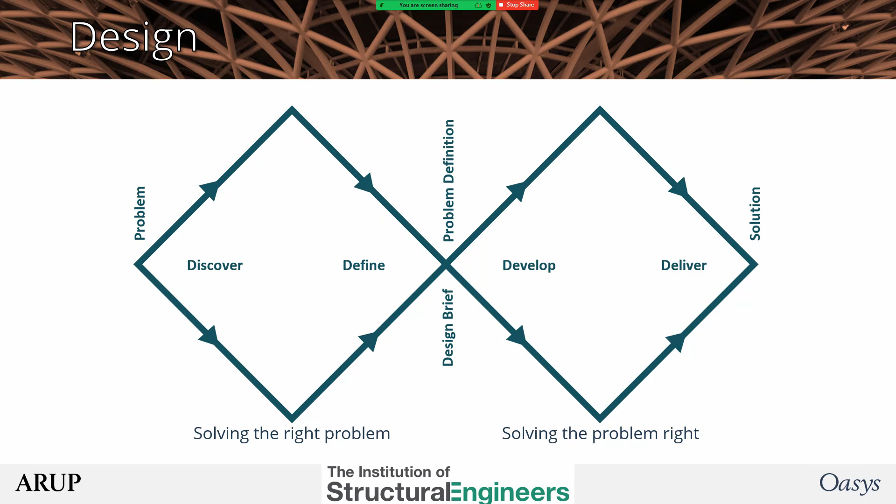Now, the Design Council puts design another way—there being more than one way to do something—and they introduce us to the design double diamond, where the project starts from the left and works across to the right. In the discovery and development phases, the design broadens as you explore the options—what they can be—so don't close these options down too soon. Whereas it's in the define and deliver phases that you need to refine and concentrate on what the problem is and what your solution is. And even this doesn't take into account the cyclical nature of design.

To help with that, I want to take a closer look at the development phase and the method we call parametric design. We all know that layouts are driven by constraints and dimensions. We know it too well when the architect or client changes them, making the scheme bigger or smaller, and then we have to start all over again. With parametric design, we plan for the change by encapsulating those constraints and rules into a geometric computer model—a design led by parameters.

This might be mundane, like the span of a decking slab, or complex, like the offset from a curved spline surface. Parametric design started in the aeronautical industry, and I think the first significant parametric design in the building industry was Frank Gehry's Guggenheim Museum in Bilbao, Spain, which opened in 1997. Parametric design in the 90s ran on supercomputers using software designed for making fighter jets. Today, it's much simpler—programs like Rhino, running a plate of spaghetti script in Grasshopper to generate the geometry, then exporting for FE analysis and CAD for detailing and documentation.

Now, BIM—building information modeling—used to be all about neutral file formats, but we've moved on from that today. Now it's all about digital workflows, though the underlying principle of data reuse remains the same.

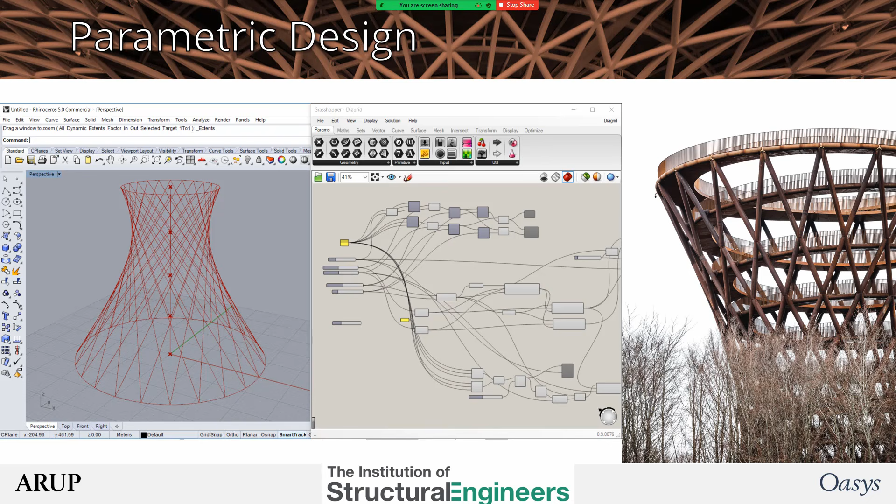Now, you've got design, you need to validate the design, usually using finite element analysis. FE was first used in the 1950s, aircraft again, and in the 1960s on buildings. As far as I know, the first structural engineering use was by Arup on the Sydney Opera House, though I'll be very interested to know if you know of any earlier examples.

FE books tend to focus on the maths of the methods, which is great if you want to write your own program, but the majority of engineers just want to use a commercial program. So my aim here was to teach how to make the best models with a little bit of maths thrown in, as it can be interesting and informative. As a side note, I think FE maths tends to be taught more at universities because marking maths is a lot easier than modelling.

Modelling is an art, and therefore there is no one right way of doing it. Rather, there are better ways and worse ways, and occasionally a completely wrong way of doing it, of course. So, what is a model?

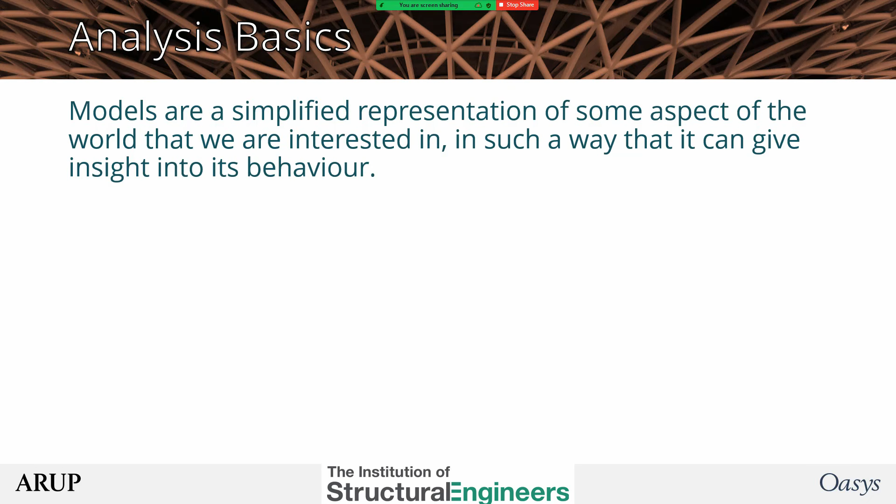Models are not reality. So this is not a real beam, these are not real connections. They are a simplified representation of reality. The model doesn't represent everything about the real connection, the real beam, but they are close enough for engineering.

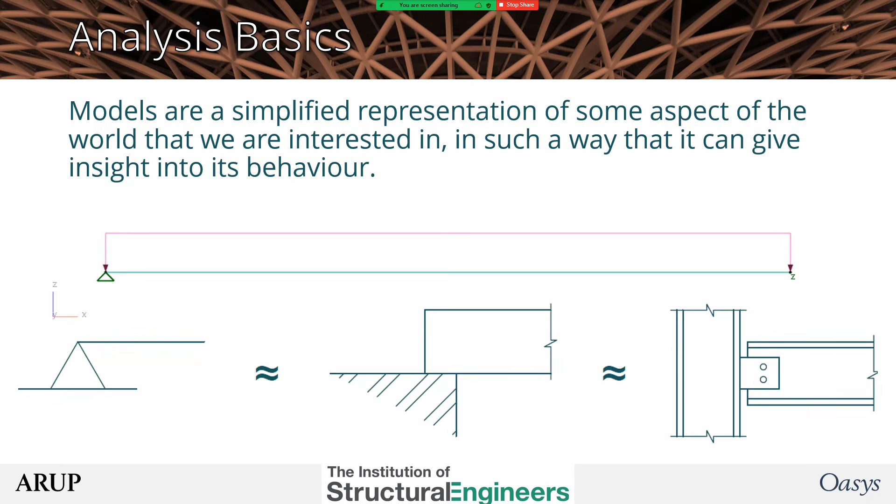So the model is a simplification of reality, it's not reality, and therefore it's important to remember that all models are wrong, but some models are useful.

Is it possible to do a totally realistic model and test it with everything the real structure experiences over its service life? No. The closest you can get is to build the structure for real out of steel and concrete, then load it until it breaks, then repeat with other loadings.

But would that be 100% accurate? Well, no, that won't be either. Due to tolerances, the steel and concrete sections will be slightly different size, the frame won't be quite as plumb, and the wind, snow, and earthquake loads will not be exactly the same. Besides which, we don't know exactly what the structure will experience over the next 50 years. It's just not possible. As I said, the art of engineering is to get answers which are close enough.

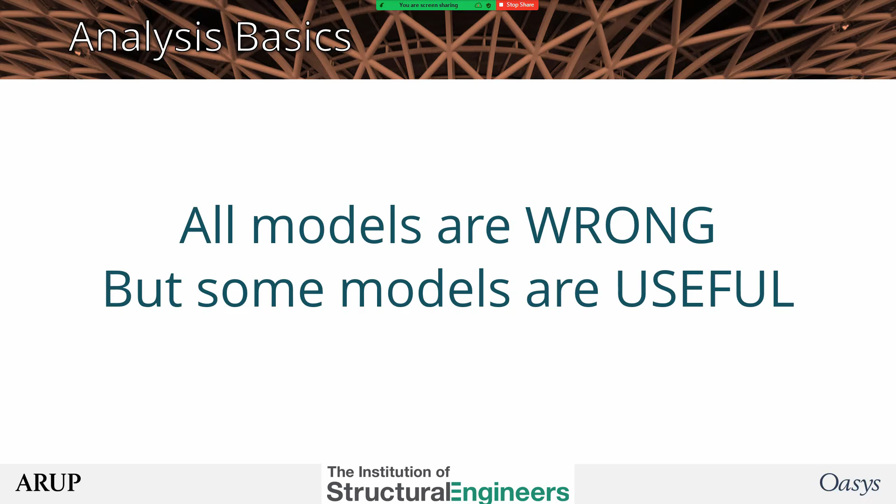To illustrate this, let's consider the stool paradox. If you sit centrally on a three-legged stool, then your weight will be carried approximately equally down each leg. Design load on each leg is your weight divided by 3.

But if you sit on a four-legged stool, then will design load be divided by 4? No, because the stool will not be perfectly built, the floor it sits on won't be perfectly flat, and only 2, possibly 3, legs will actually be fully in contact with the floor. Your weight will be mostly carried by 2 of the legs, meaning that design load is now your weight divided by 2, an increase of 50% thanks to the addition of an extra leg.

Now, when we build analysis models, we tend to assume the structure will be perfect, the floor is smooth, the stool is even, every leg is fully in contact with the floor. Reality is not so neat. On the other hand, structures will often work the way we design them if they have enough ductility. In the case of the stool, the connections may have a little bit of flexibility if they're not glued, the top may warp a bit, and so on.

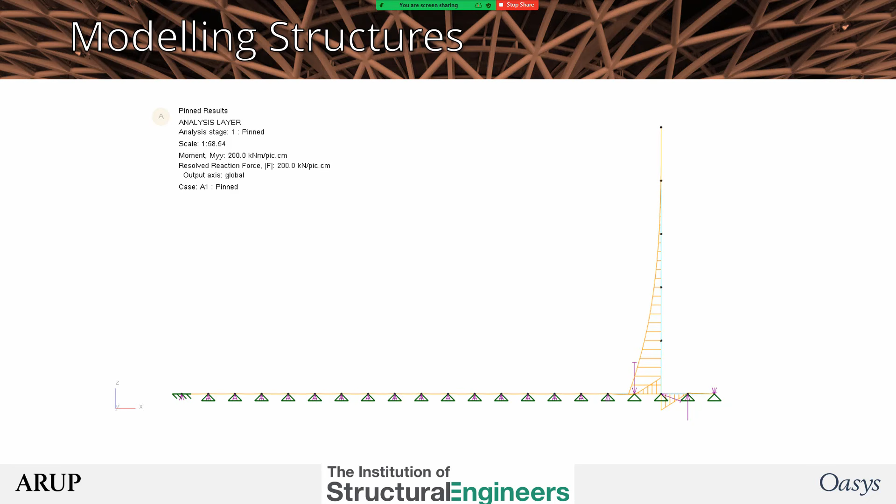So some moment redistribution occurs because of plasticity, but a lot will occur because of the error in assuming that the support is infinitely stiff. Model the ground with springs, or the support with springs, and you'll notice the sagging increases, hogging reduces, and so on. Likewise, the retaining wall model I did back there would also give correct bending moments in the base.

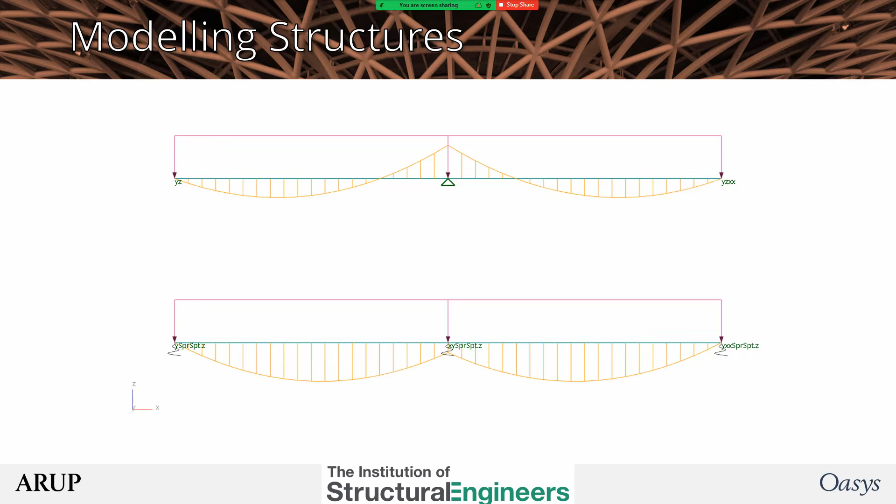Now, do we really know how stiff the beam will be? How stiff the ground? Approximately. How confident can we be with the results?

Well, take a steel beam. When rolled to European tolerance standards, I'm sure South African standards are similar, its area can vary by about 4%, and its bending stiffness by about 10%. This means that for every factory-made beam, there is no point calculating deflections beyond two significant figures. Concrete beam stiffnesses will vary even more, both from tolerances and the effects of cracking, and so on.

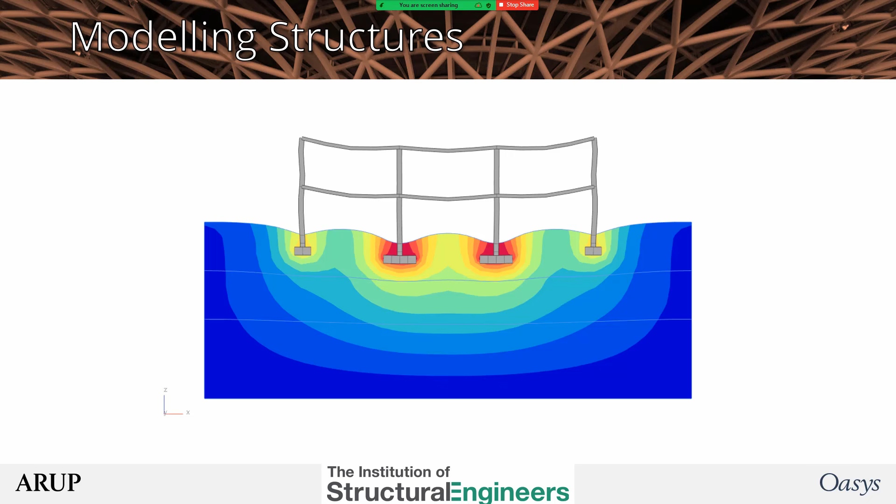Now, FE models are analogues of the real structure, and we model them with 1D, 2D, and sometimes 3D elements. 1D elements are great when the stress flows are essentially one-dimensional, like in beams, where one dimension, the length, is considerably more than the other two. 2D elements are suitable when the stresses move in two directions, with one dimension, thickness, being considerably less than the other two. And 3D elements, well, I think you can guess about that.

Now, these are all analogies, and these analogies will break down when the stress flow directions change, like the connections between the beam or slab and the column. For this reason, a simple overall model can inform a more detailed model of a part of the structure, but you would not want to model the entire structure in such detail. You would not want to model either of these two examples totally in 3D elements. It would be a complete waste of time.

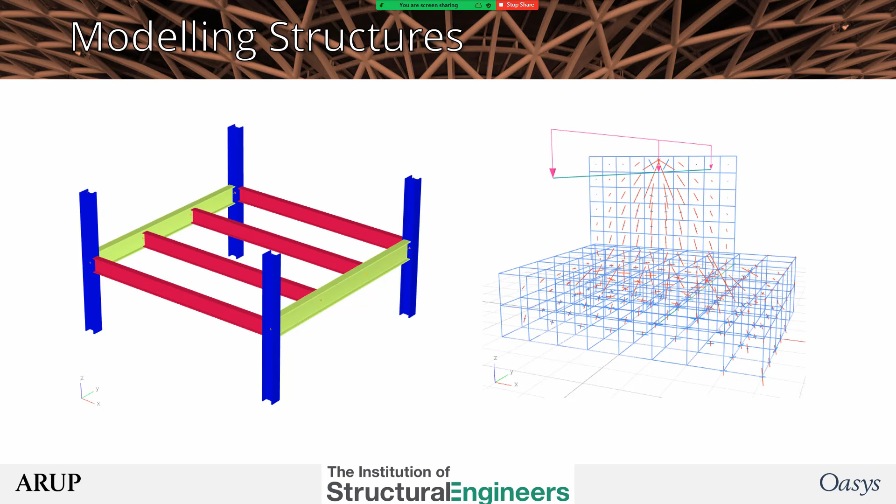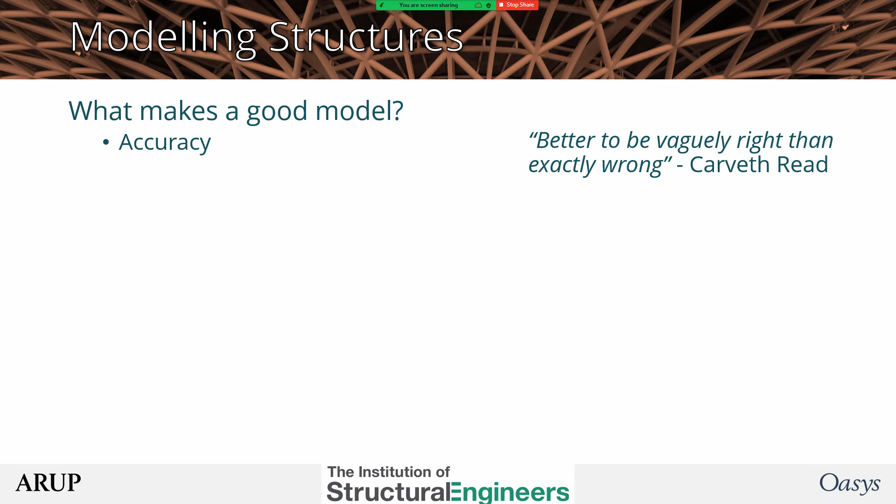So what does make a good model? It needs to be as accurate as necessary. Do a sensitivity check, vary the stiffnesses, the dimensions, do a p-delta or a nonlinear analysis. Are the results close enough? It needs to be as realistic as appropriate. Remember that increased realism is subject to diminishing returns. Stop when it's not worth continuing.

It needs to be as simple as possible. Simplicity comes from experience. My first FE model back in university took 24 hours to run on the university mainframe. Today, I would achieve the same results with perhaps a model with maybe only 1% of the number of elements in it.

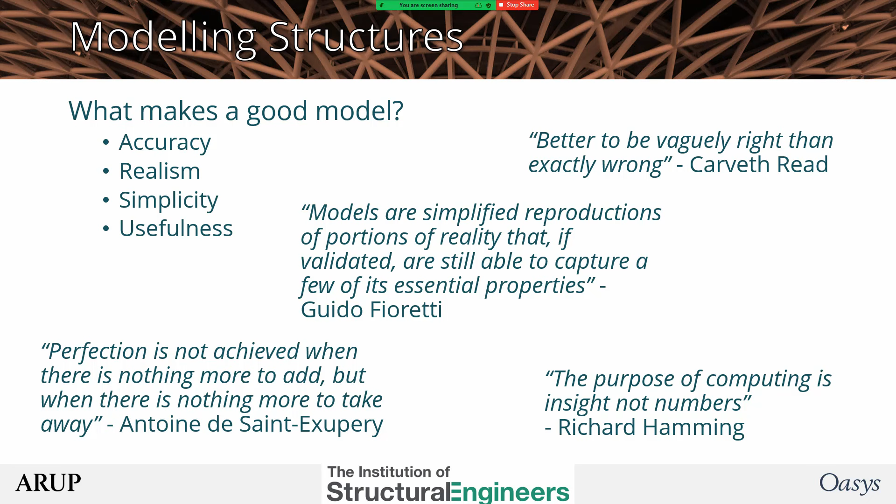It also needs to be useful and relevant. Does the model give you the answers you need? For example, static or dynamic analyses often require quite different models. So the essential question you need to ask yourself is, what is the question that I am trying to answer? Then make sure you design your model to achieve that.

Now, analysis methods. It would not be a book looking at FE if it did not have some exploration of the maths behind the methods. My requirement in the book was to do it with a minimum amount of maths, and now we've only got, let's say, 5 minutes to look at a topic which normally takes up entire textbooks. So let's see if I can keep it both useful and simple.

Now, take a simple beam. We know that when we apply a force to a structure, its deformation, U, is proportional to the external force F, and inversely proportional to the stiffness—or stiffness times deflection equals force. If you look at this beam element, which only has axial stiffness, keep it simple, you'll know it has some stiffness horizontally in the x direction, but zero in the y direction.

There will be forces applied to both ends of the element, which can cause both ends to move. Again, keeping it simple and looking only at the forces and displacements in line with the elements, we can see there's U1, U2, F1, F2, and so on. We can write these equations out in a matrix form, so that we can then use matrix maths to find all the displacements.

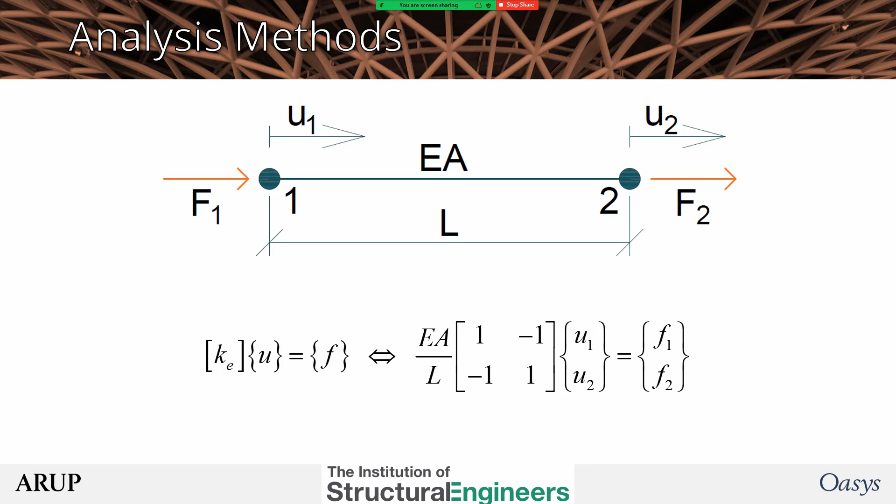And all the forces. Now, we already know some of the forces—these are the externally applied forces. The other forces we're finding are the reactions. And also you'll find, when you do the analysis, the forces within the structure all cancel out because it's in equilibrium, or at least close enough.

So we have the stiffness of each individual element, or each element stiffness matrix, and we combine these together to make a global stiffness matrix. For simplicity, I've shown them separately, but in reality they'll actually overlap and combine wherever they have a shared node. And for extra simplicity, we can write this as Ku equals F—the stiffness matrix K times the displacement vector U equals the force vector F.

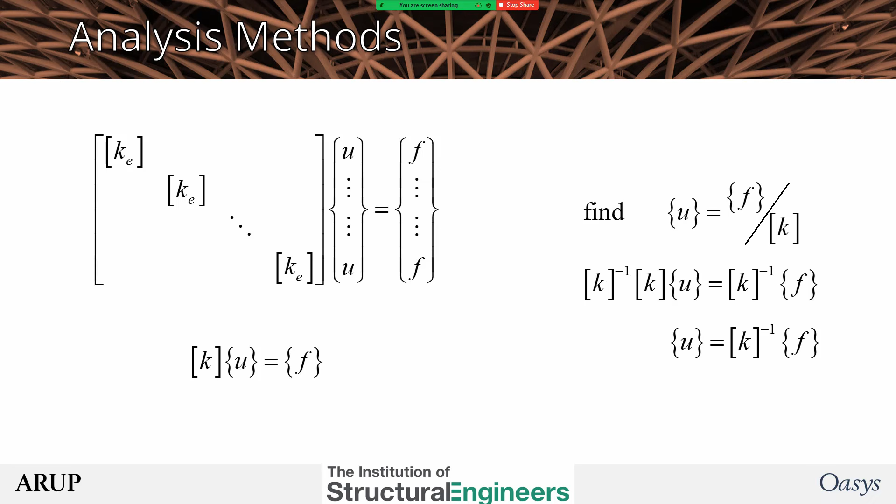Now, we need to find the displacements U, but we can't divide by a matrix. Instead, we need to multiply by the inverse of the stiffness matrix on both sides. I'm not going to tell you how to invert the matrix—besides, it's not important. But what we then get is that the nodal displacements equal the inverse of the stiffness times the forces. And that, ignoring a whole host of details, is simply how FE analysis works.

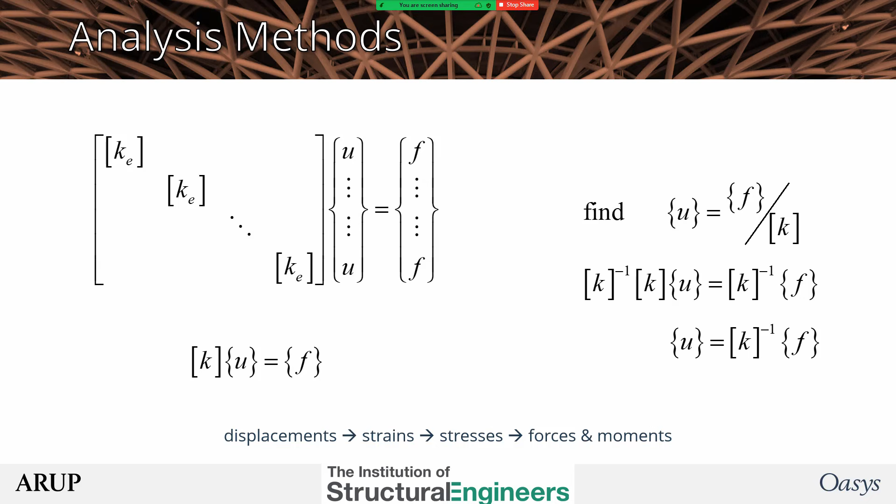I also explore various non-linear methods, even down to things like meshless methods, not easy to say, but yeah, time is far too short to look at those at the moment.

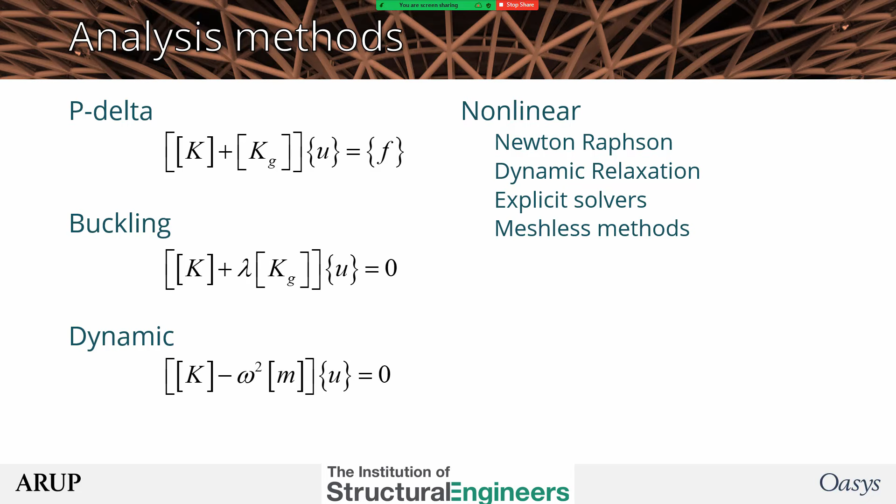So you've done the model. Now, what about errors? Never forget errors. Hartford Civic Centre, Sleipner oil rig, CTV building Christchurch. These are just 3 structural collapses caused by bad finite element analysis. Thankfully, the first 2 had no casualties, but 115 people died in the 2011 Christchurch earthquake, all in that one building. We might add the Florida University footbridge to this list, and so on.

As I said earlier, all models are wrong, but some are useful. How can you make sure that your models are useful?

So FEA, it stands for Finite Element Analysis, but also Finite Element Approximation. No digital computer can exactly represent real numbers. 3.14 is approximately pi. It may or may not be close enough depending on what you're calculating. Now, the maths of FEA is to find a solution to a whole host of simultaneous equations.

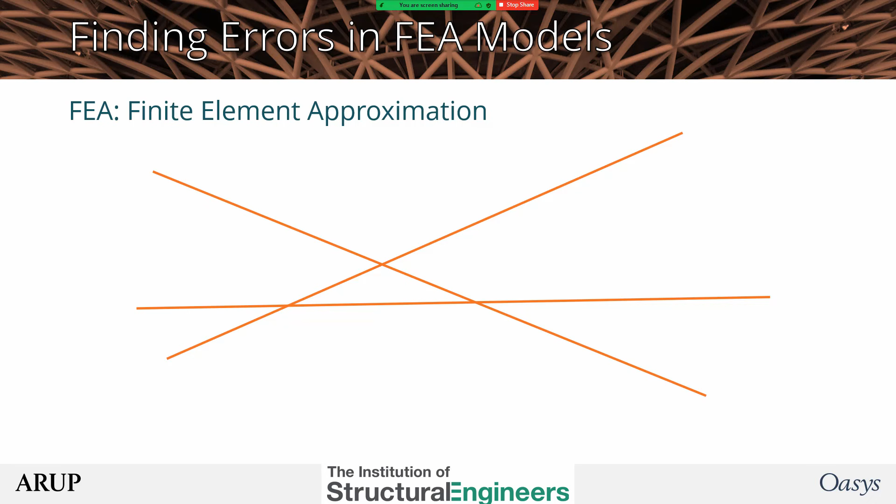Now, if we were to find the intersection of 2 lines, then the answer is definite. Add in a 3rd line, and the intersection becomes much more uncertain. So statically indeterminate structures are like this. They have this element of uncertainty about them.

So how do we get the best answers from an FE model? There is validation. Validation is ensuring that the model is valid. Does it answer the right question in the right way? Is it realistic? Does it include important checks and details like voids or stability?

Is the modeling appropriate? The Hartford Civic Center model was invalid because it ignored important details, such as the way as-built connections induced large amounts of torsion in members which had virtually no torsional capacity. Their analysis approach was also invalid as they did not check for torsional buckling. They did not ask the right questions.

The CTV building analysis model was also invalid because they did check for seismic, but they only got center point story drift output. The building had an asymmetric stability system, so torsional drift was significant, and that's what led to collapse.

We also have verification, which asks whether the model is giving the correct answers. Does it have errors in it? Now, one of the best ways to verify a model is to have a good idea what the right answers look like, whether deflection, moment, or shear.

If the results do not match up with your expectations, then it's because of one of three reasons. One, your model is wrong. Two, your expectations are wrong. Or three, the software is wrong. And it is not normally number 3 in commercial software.

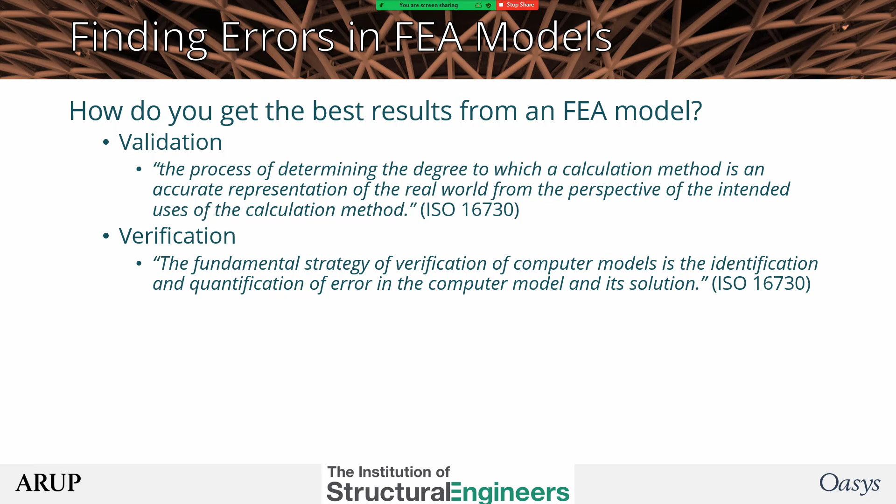So, apart from the errors and approximations inherent in modeling, where do the errors come from?

Errors come in units. These are possibly the biggest cause of errors in models, at least the ones I've seen across my desk. Confusion between newtons and kilonewtons, or meters and millimeters, whether in the materials, the sections, the model dimensions, or the loads. You can quickly find yourself out by a factor of 1,000 or even 1,000,000.

Overconstraining the model can cause errors. I remember one case where the engineer put pinned restraints on the ends of all the beams rather than pinned releases. He then complained that the columns had zero load in them.

Likewise, lack of restraints can lead to unstable models. Just because you do not have forces in a particular direction does not mean you don't need restraints in that direction. A zero stiffness will always stop the analysis, whether the model is a whole or an unconnected element.

Torsion is often forgotten about, as it sometimes can be crucial. Forgetting torsion was the dominant factor in both the CTV and Hartford Civic Center disasters, amongst others.

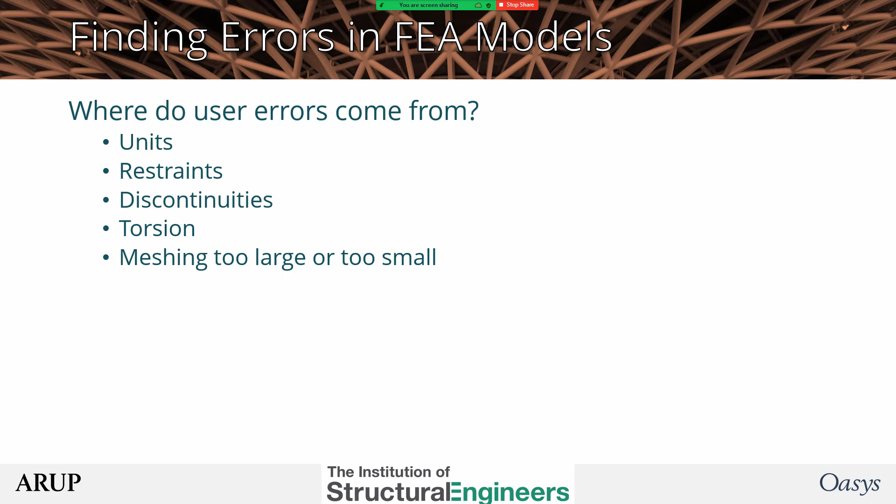Inappropriate meshing will reduce accuracy, but it can be especially crucial on buckling analysis models or dynamic models too. Meshing was also a factor in the Sleipner oil rig. Keep halving the mesh until the results stabilize.

Second order effects: if you've got large deflections, you need a nonlinear analysis. And then you've got to remember, you cannot multiply or combine results from nonlinear analyses. And there's also whatever else it is that you've forgotten.

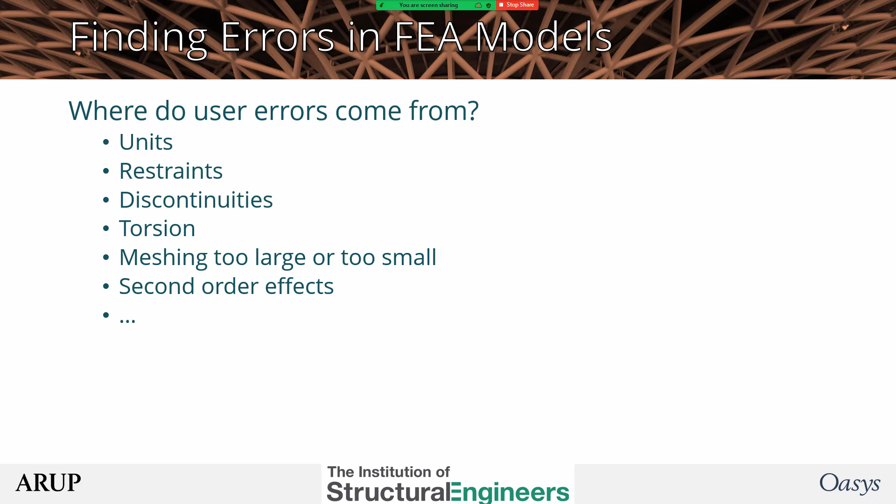Now you have your model working well. It is time to make it work even better.

Optimization is something I think almost all engineers are interested in, whether it's finding the lightest beam to making a bridge span several kilometers across the sea, carrying just its own weight.

And now we also have the drive towards zero carbon construction, both from industry and from clients. The construction industry contributes about 8% of the world's greenhouse gases.

The main emissions used to be from the service life of buildings, heating or cooling, but improved insulation and efficiencies like that have greatly reduced those. Now it is the structure which is a major source of environmental damage, and we need to do our bit by making every building and structure more efficient.

Now, I've heard many opinions as to what optimization is. In its simplest term, it is minimizing the cost of something in a design subject to various constraints - the cost, the weight, the amount of material, the construction time, etc.

Now, here we have the standard formula, and I'm not quite sure if it's actually useful, but there seems to be a law that says all text on optimization must include this equation. So here it is.

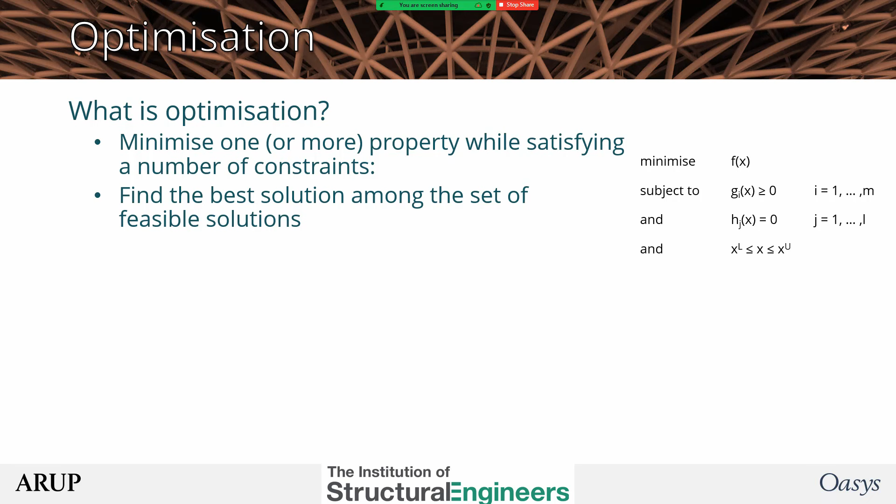Now, to computerize optimization, you need a cost function, a way of measuring just how optimum or efficient a solution is. And you need to decide what variables you're going to explore or adjust to find that optimum.

And you need to know what is and what is not acceptable. For example, a structure cannot fail, nor can it deflect too much.

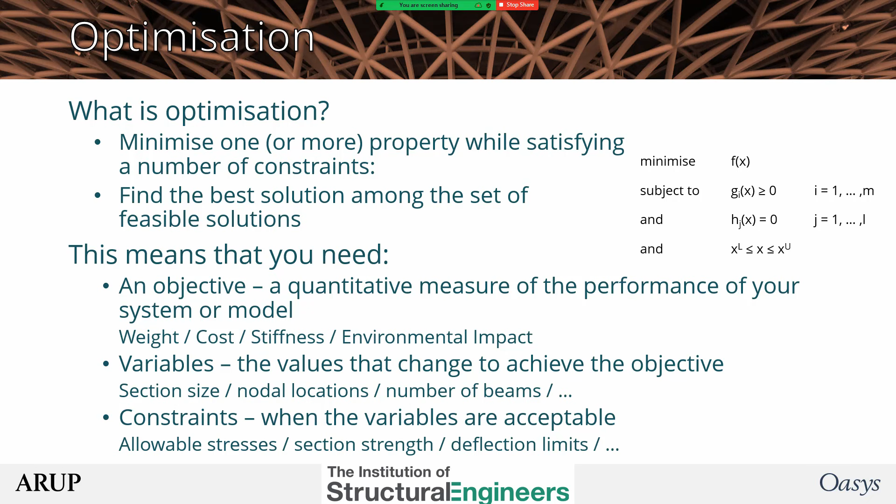So you've decided you've got to minimize the cost, or the weight, or the construction time, anyway, of your structure. How might you go about that?

So there are three main categories of optimization. There is section optimization, determining the best section size, which is probably the simplest option. It also has the least effect on the overall cost of the building.

There is shape optimization, which looks at the shape of the building, of the truss, of the section itself. And then there's topology optimization, which looks at the scheme as a whole - span directions, number of columns, what materials you're using, and so on.

Now, topology has the largest effect on the end result, so this is what you should do first. In fact, this list is actually in reverse order.

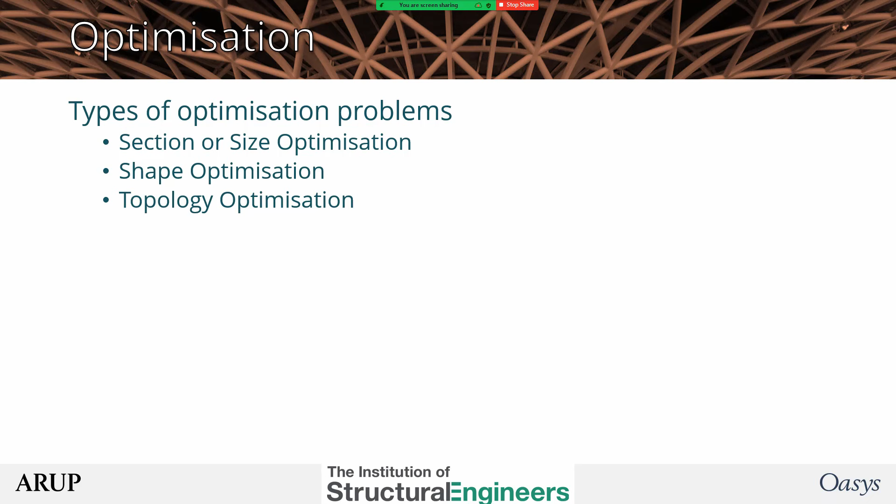But topology - in 2012, IStructE President John Nolan gave in his inaugural address a simple and powerful example of topology optimization: a simple single-story industrial building.

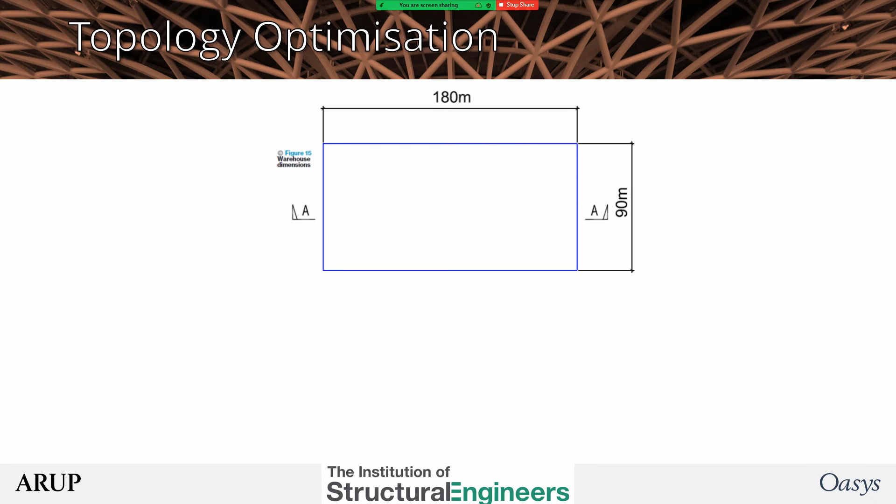Now, if we span the roof in the short direction, is it best to have 2, 3, or 4 bays? If we span the long direction, is it 4 to 9 bays? Do we put columns in everywhere or use a hit and miss layout? Do we use moment bases to reduce the frame sizes but increase the cost of the foundations? Even with just this, we are already dealing with over 100 different layout options.

It's worthwhile exploring this, and then this will make a big impact on the final structure.

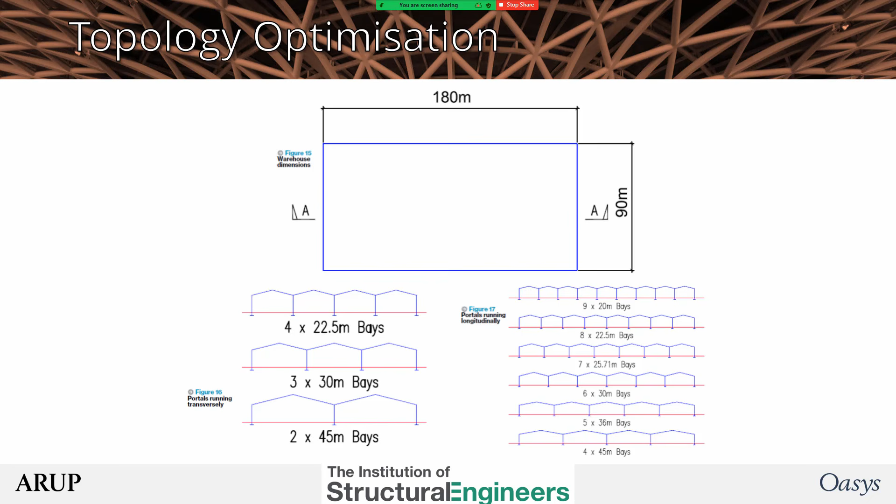Things like trusses - I've often wondered over the years about the various forms of truss, like Pratt, Warren, Fink, Howe, and which are the most efficient. What I didn't realize was about 100 years ago, an Australian engineer called Michell had found the answer. He used Maxwell's theorem of load paths and proved it is possible to determine the most optimum truss.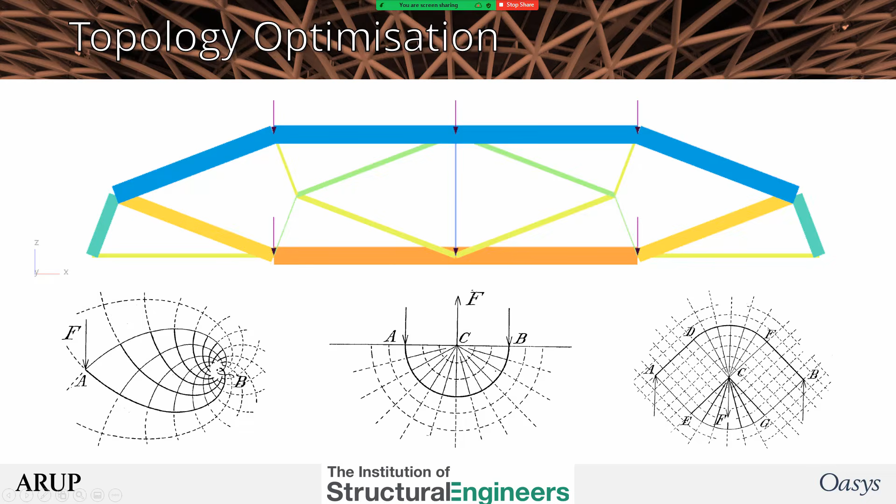Now, topology and shape can often get confused. Indeed, the boundaries between the two can be fuzzy. So here are three examples. The original form and the topology remain the same if you can stretch one form into another without breaking it - hence the often quoted example that a donut and a coffee mug are topologically the same, which could explain why they go so well together.

Here the shape is a rectangle or a bowstring, while the topology is the number of internal elements in the truss.

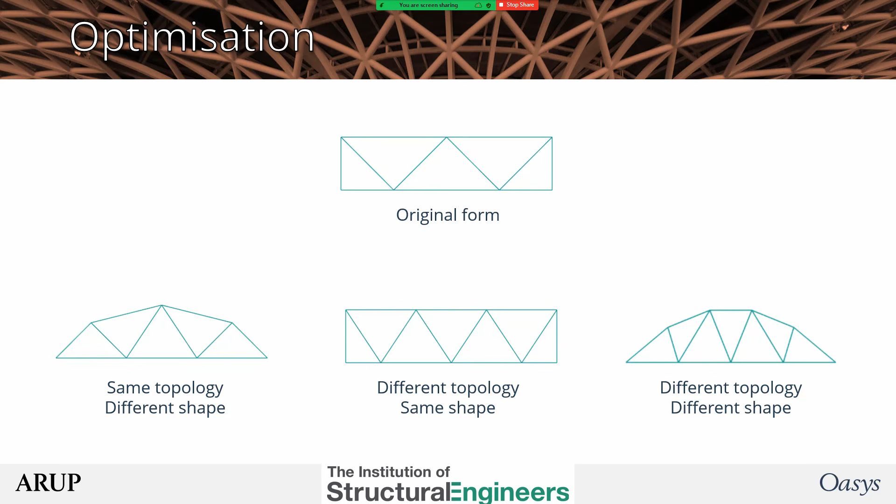Shape optimization itself is getting the most from the structure by adjusting the location of the truss nodes, the section corners, the thicknesses, the ridge heights, and so on, to get the most efficient structure.

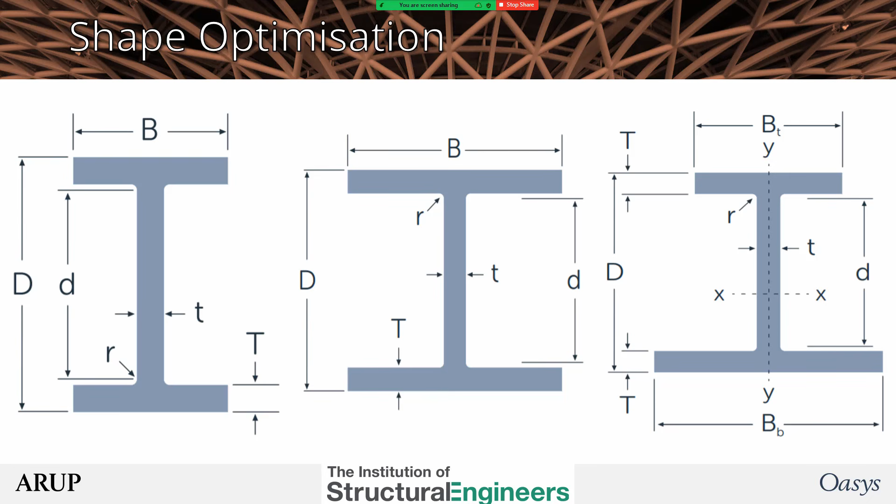I-beams are generally recognized as being very efficient, but still they come in a variety of shapes, depending on whether they are being used for bending or mostly for compression or composite action.

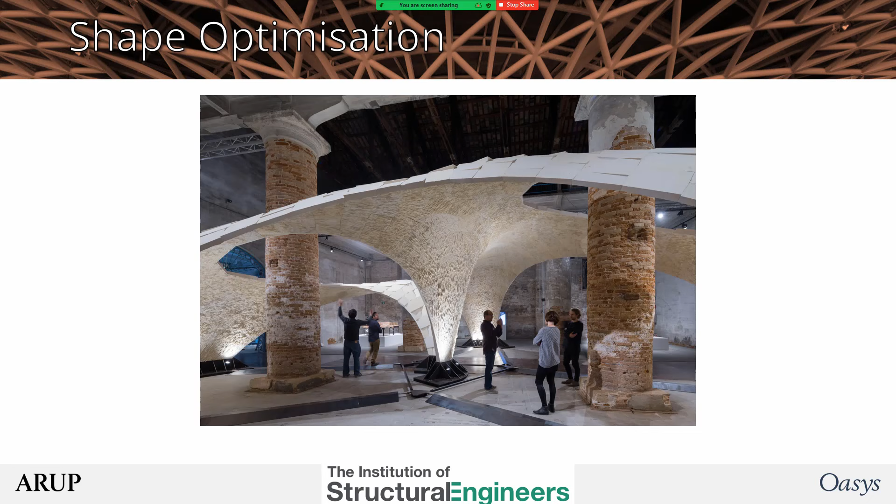Shape optimization is essential if you're designing a compression or tension only structure, as the right shape should minimize the chance of buckling or wrinkles, as is appropriate.

And we have section optimization, which is something I think all engineers are familiar with, but it can still throw up some problems. Optimizing the section for a single statically determinate beam is straightforward, but when the beam stiffnesses interact, then it gets a lot more complex.

Even this simple cruciform of two beams, both with the same span, central point load - there are actually 3 principal optimum solutions. Well, it's actually 4 more, 7 total, which I don't have time to cover now.

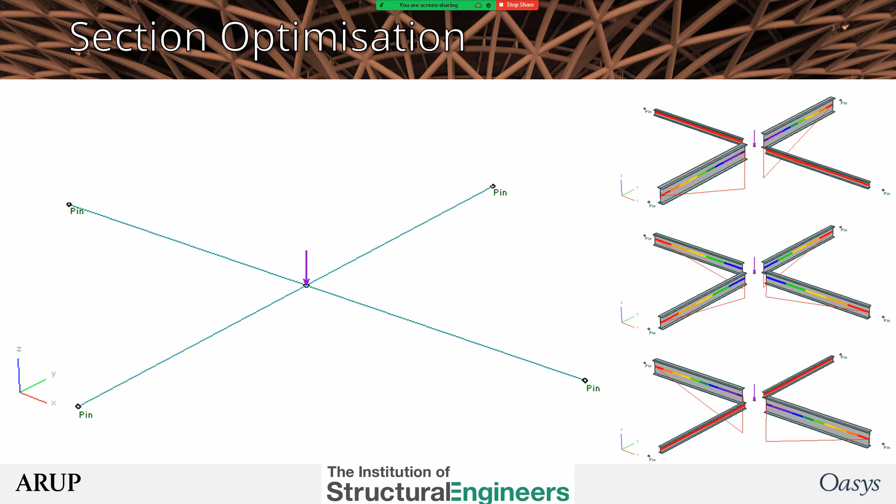And if you are looking at a more complex structure, such as a two-way spanning Vierendeel truss or space frame, then it takes a lot of iterations before you determine what the most effective set of sections are.

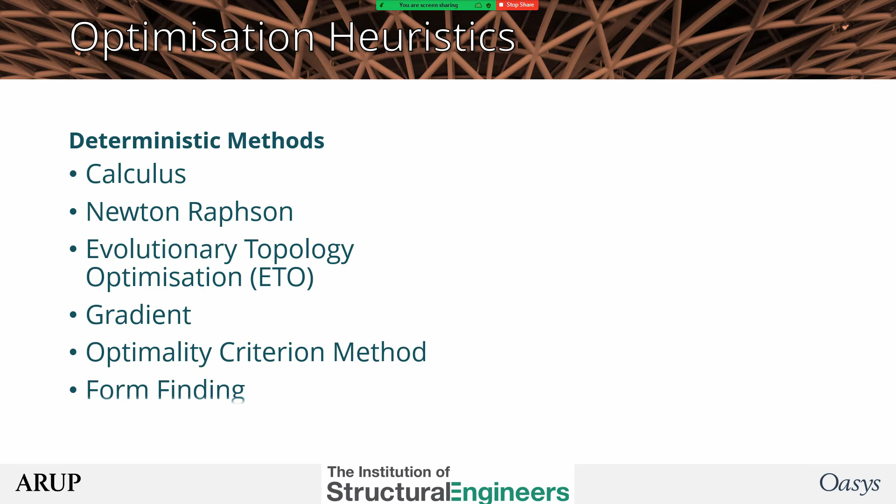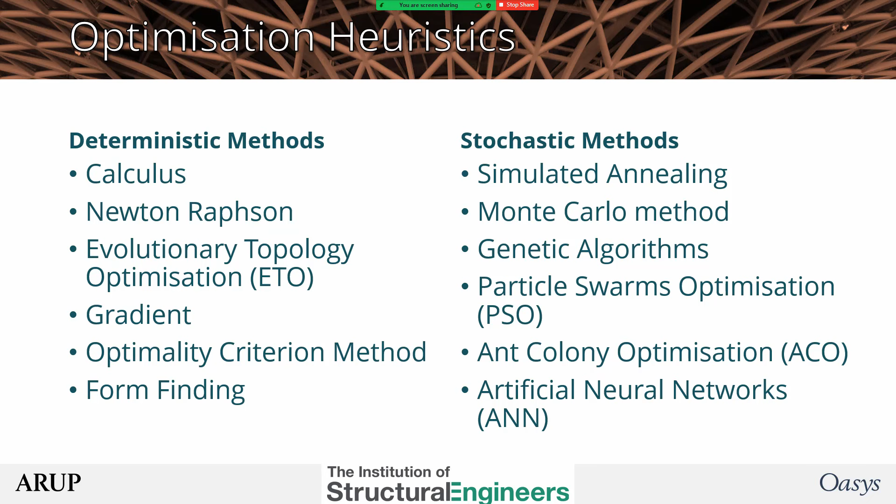Now, we do not have time to cover everything regarding optimization now. I've been known to talk about it for several hours, and this book contains 2 chapters on the subject. As a teaser, here is a list of the principal heuristics or methods for optimizing a structure or other engineering problem, all of which we cover.

And now we go from looking at state-of-the-art to cutting edge: artificial intelligence and machine learning.

The concept of artificial intelligence has been with us since the dawn of the computer age. The term was invented in 1956 at the Dartmouth Research Project in the US, where a number of scientists and mathematicians gathered together to make a machine simulate thought. The expectation was that if a carefully selected group of scientists worked together for a summer, they should make significant progress. Now, 70 years later, we know they were rather optimistic, to say the least.

But from that starting point, there were many useful techniques and methods that have arisen, even if none of them have come close to simulating thought.

Now, the initial quest for artificial thinking was with symbolic logic or predicate calculus. While they completely failed to simulate thinking, the natural language processing did give us grammar checkers for our word processors - very useful.

And though by another technique, natural language processing is now found in most homes and pockets. So after machine learning parses speech sounds into words, NLP groups the words into sentences, works out which parts are nouns, verbs, adjectives from the grammatical rules, then determines the instruction or question, and then will either try to find the answer from the internet, or play the music of your choice, or do something random.

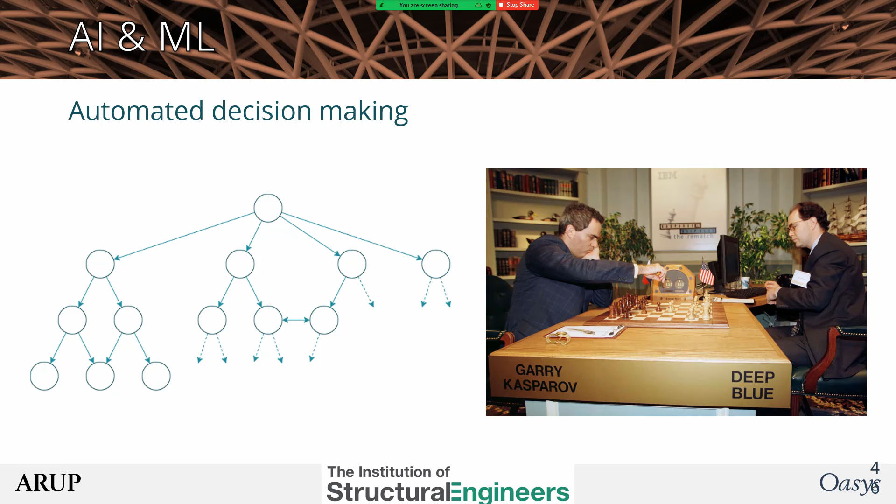Another aim of AI is to encapsulate knowledge and enable automatic decision making, and this can be in the form of a state search. So state search builds a tree of possible decisions and then navigates it to find the best possible answer, or at least the most promising route to the answer. And these have proved very successful in games. Games like chess are formal, they have rules, and have boundaries.

And while neural networks have been around since the 1960s, they were initially very unsuccessful. But now, with fast processors, powerful training algorithms, and the huge amount of data available on the internet, they are now the dominant machine learning method.

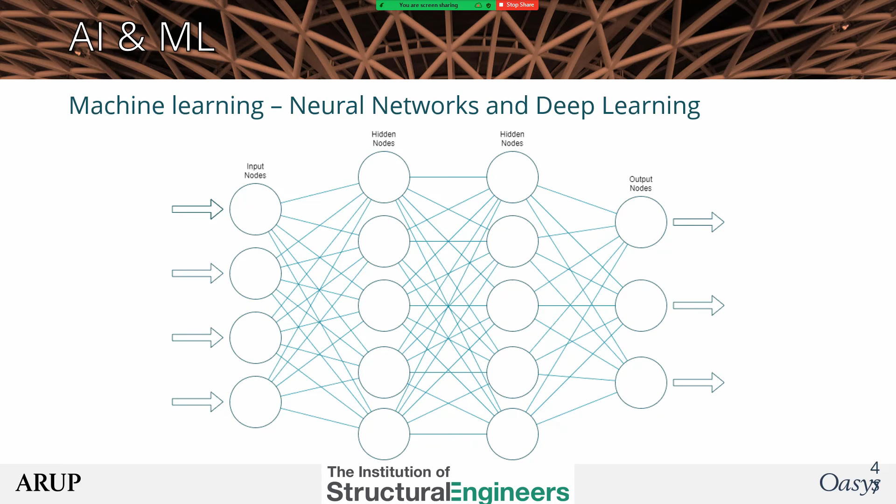Neural networks are inspired by how neurons in the brain connect together, collating data to enable pattern recognition. Artificial neural networks work by taking numerical data with a number of inputs, multiplying them, adding these together multiple times until an output indicates which is probably the answer. If they are right, those options are strengthened, and if they're wrong, they're weakened. And this neural network is then trained over thousands of iterations until it consistently, or at least generally, gives the right answers.

Now, while machine learning methods such as deep learning have proved successful in applications such as recognizing videos of kittens on YouTube, in structural engineering we have the problem of a lack of suitable data to train the systems. Hopefully this will change in future, and we will see more AI and machine learning engineering assistance in future helping us in our tasks.

Now, computing has already made changes to the industry in my lifetime, and I foresee more of them coming. AI and machine learning will increase their presence. I think the major change to us will be due to climate change and the efforts to mitigate it. So the main thing that we must change is how much material we build. We must use less. We must also build less and refurbish more, only doing new builds when there's not an option.

Optimization is going to be a significant tool for us in the future, whether automatically exploring the structural topology, shape or sections. And I know there's a fear that optimization could reduce factor of safety, but I think hopefully we can see that improving topology and shape of the structures will improve efficiency without compromising any safety. There's also concern it might increase costs, which, yeah, in some circumstances it might be true, but by no means all. More efficient construction should be cheaper.

There are also an increased number of clients who want to ensure their projects are environmentally sound. And on the plus side, reducing the cost of structures will also mean more efforts, so should mean more fees.